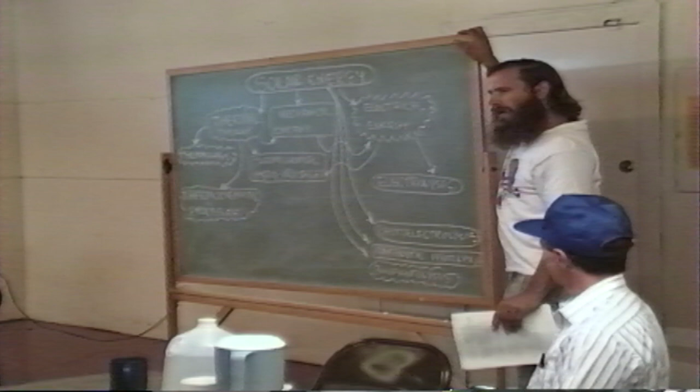We'll take a look here at this flow diagram, and perhaps you can see some of the approaches that have been tried, along with electrolysis here, which is the process that's been around the longest and about which we know the most. But there are other more obscure approaches that may be very viable and in the long run may prove to be more economically feasible than even electrolysis.

So if we have solar energy, the problem up till now has not necessarily been how to capture solar energy, but how to store it and distribute it. Because by its very nature, solar energy is intermittent - it varies from day to day, it varies from season to season, it's concentrated in some parts of the globe and not others, and so it doesn't necessarily match the needs of consumers. So what we need to accomplish is to produce hydrogen, store it, and then distribute it.

Now, there are techniques and strategies for harnessing solar energy and converting photons into electrical energy. For example, photovoltaics, or solar thermal processes like Stirling engines mounted at the focal point of parabolic dishes, or like the Luz plants in Southern California that produce currently most of the solar generated electricity in the world today. And wind generation of electricity is one of the most affordable methods right at this point in time. The price keeps coming down - it's down to maybe 7 cents a kilowatt hour, and they project in the near future it may be down as low as 5 cents a kilowatt hour and competitive with fossil fuel centralized power plants.

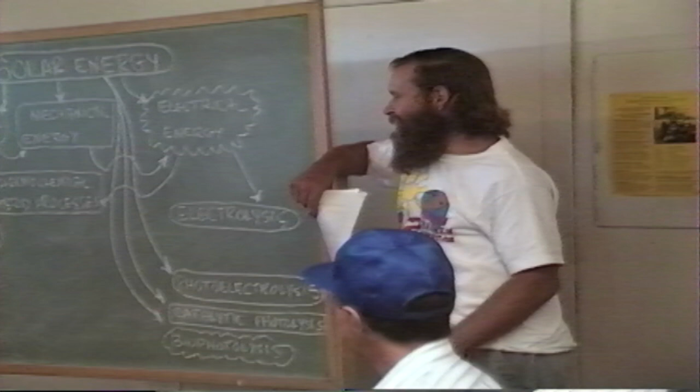This was kind of thrown on me. They asked me to do the overview. I didn't know I was going to be doing this talking. I'm David Booth. I'm affiliated with Alternative Energy Engineering. I have a little hydrogen information booth attached to that tent. I consider myself a student of hydrogen. I'm in no way an expert. These are the three panelists, the experts in the field, whether they want to be called that or not. They have as much expertise as we're likely to find in this country with the amount of research and development funding that's made available. They have done some very exciting work.

Want to introduce yourselves? Sure we can. I'm Walt Pyle from Chevron Research and Technology. I'm going to be talking to you a little bit later this morning about thermolysis, which is the one-step thermal process for manufacturing hydrogen from water and sunlight.

I'm Peter Lehman. I'm a professor of environmental resources engineering at Humboldt State University up north here. And I'm going to be talking about a project that we have ongoing at HSU in which we use electrolysis and produce electricity using photovoltaic panels, then produce hydrogen by electrolysis and recover the electricity with a fuel cell.

Be talking about that. I'm Roy McAlister. I'm president of the American Hydrogen Association, and I'm going to be talking about the subjects that these two fellows leave out. And I'm going to answer questions. I'd really like to hear your questions, and I'll shape my comments to your areas of interest.

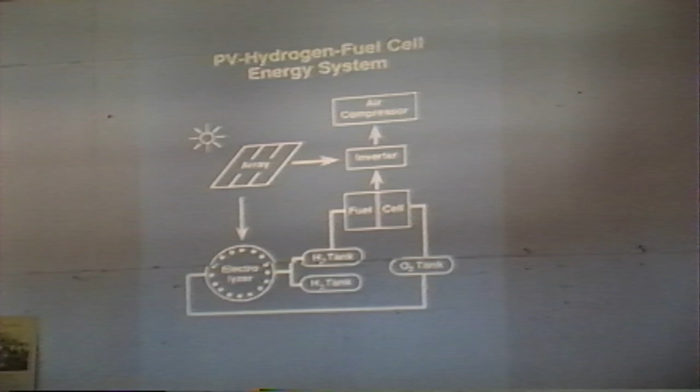That makes hydrogen and oxygen, and we store them in tanks. The electrolyzer is an alkaline, bipolar, medium pressure electrolyzer. It produces gases at about 100 psi, and they are stored in tanks, 2 hydrogen tanks and 1 oxygen tank, because you get twice as much hydrogen as oxygen. We just use regular LPG storage tanks. We have 1,000 gallon storage of hydrogen and 500 gallons of oxygen at about 100 psi.

Then, whenever the sun can't provide enough energy to run the air compressor on a very cloudy day or at night, we feed the gases to a fuel cell, and the fuel cell automatically and smoothly takes over the load and supplies the electricity to the inverter and the air compressor.

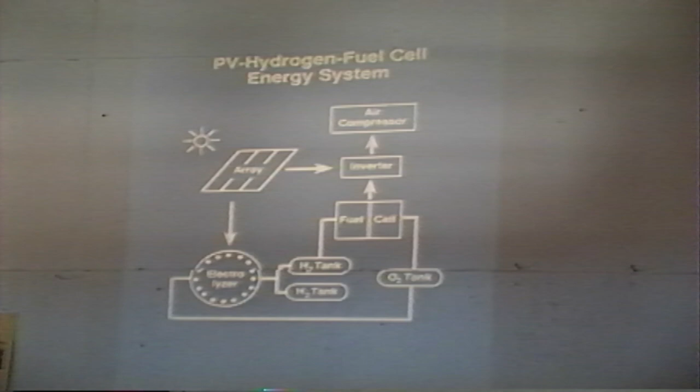I should tell you right off the bat that this project is now about 2.5 years old and has been running real well, except for the fact that we don't have a fuel cell that works. That's a long story, which I will tell you some of. Okay, next slide please.

Here's where we are. Most of you know about Arcata. When I give this talk elsewhere, people don't know about Northern California. We're in the northern part of Humboldt County in Trinidad, about 15 miles north of Arcata, which is the main campus of HSU, is the Marine Laboratory. Okay, next slide.

There's the sign at the outside of the Marine Lab. Next slide please, and there's the array.

It is 192 ARCO modules. These are really ARCO modules - we bought them from SES in Willits, just before ARCO was taken over by Siemens, the German company that now owns ARCO. So these are some of the last ARCO modules in the world. And you can see the location, it's right on the coast, on the Pacific coast.

That's very scenic, and I get nice views. How many cloudy days do you get a year? I get a lot more cloudy days than you get here in Willits.

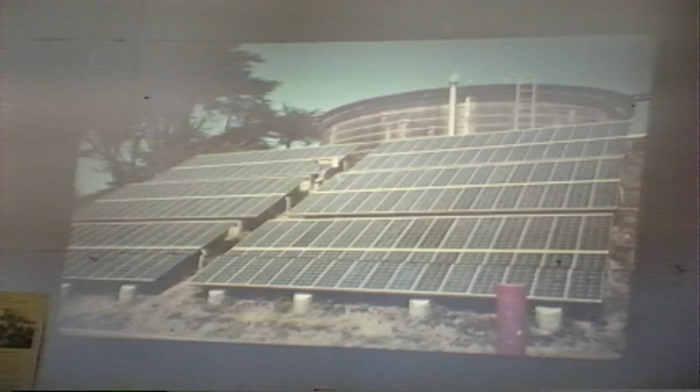Okay, next slide please. You didn't have to do any landscaping there, that was a convenient south slope? That was a convenient south slope, and in fact, when I first got to HSU 13 years ago, I toured the Marine Lab and saw that south slope and said, that's a perfect place for a solar project. And sure enough, 10 years later, we did it.

Now, having said that, if you ask me if I'll ever do this again, the answer is no. Working on a 32-degree slope was a pain in the butt. It was really hard to get that set up like that. In fact, Tim Murphy was one of the people who really put in a lot of work in getting it to look as nice as it does.

I can say something about how these arrays work. There are 6 structures, each structure is 2 subarrays, and they're each divided in half electrically. So there are 12 subarrays in total, and each of those can be switched individually either to the load, the air compressor, or to the electrolyzer. That's the way we control the system, and I'll show you a little about that later.

This is a 24-volt system. Each of these pairs, one on top of the other, is in series, and the rest are in parallel, so we're running at 24 volts. We chose 24 volts because the electrolyzer was available in about that voltage, although the electrolyzer voltage varies somewhat. If this were a large commercial PV hydrogen facility, we would choose a much higher voltage, so we'd have much smaller wires. In fact, if I were designing this on a larger scale, I would probably design it to run at 400 or 500 volts. That's a lot more dangerous, but on a commercial scale, it makes a lot more sense. So this is a low voltage system, but probably in the future these will be high voltage systems.

Here's the electrolyzer, it's hard to see, isn't it? Everything here is the inside of the building now. The electrolyzer is this gray frame thing in back. Everything, the electrolyzer and all the piping, is in a hood which has plexiglass sides. Here is one plexiglass side, magnetically attached to the metal framing around it. It's all sealed in that hood, which is continuously vented by an explosion-proof fan. There are vents in the bottom that draw air from the bottom of the building through that hood area, and the idea is that if there's any hydrogen leak, it's immediately vented.

We have hydrogen sensors in the lab and in the hood. Whenever the hydrogen concentration gets to half of the lower combustion limit, which is 4%, so when it gets to 2%, we would shut down. We have an air movement sensor in the hood, and whenever the ventilation fails, we would shut down. That's trying to be as safe as possible.

We have taken hydrogen from the electrolyzer, in fact we do this frequently, and dumped it straight in the hood. With the fan on, it barely budges the needle on the hydrogen sensor. What that's saying, going back to a comment made earlier, is that hydrogen is so buoyant and so diffusive that it doesn't build up at all. Even if we turn the fan off, it's not possible to get a combustible mixture inside the hood. The natural buoyancy of hydrogen going up the duct is enough to carry it up and away before it reaches a combustible mixture.

And what else is in there? We have a small battery, I'll talk about that in a minute. We have a chiller which sends chilled water to condensers. We condense as much water out of the gases as we can before we put them in our storage tank, so we don't end up with a small lake inside the storage tank.

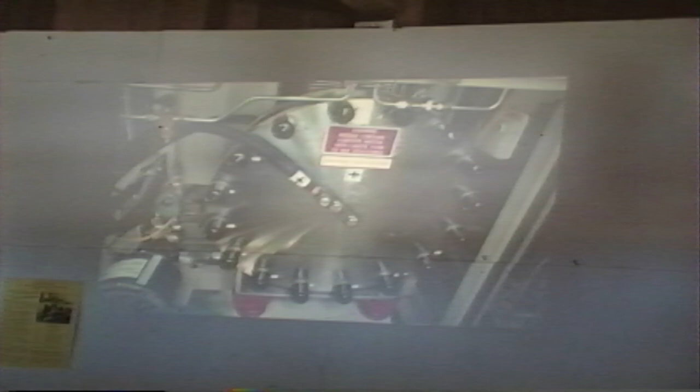You're bringing in outside air, Peter, so it's full of salt and stuff, right? Well, yeah, it remains to be seen how long the fan lasts before it falls apart and things like that, which is an issue, stainless steel corrodes in this environment. Fans are easy to replace, but all this other stuff, well, so far we haven't seen much corrosion, so I'm fairly hopeful. The air does come in from under the building, so the airborne salt spray thrown around in a big storm is less likely to make it into that airstream because it's got a very convoluted path. But it remains to be seen how corrosive this will be.

This is a close-up of the electrolysis module. That warning high voltage sign is something I got to change to a warning low voltage one of these days, because it is low voltage.

You can grab it like this and nothing happens when it's on. That is a stainless steel end plate, and there's another stainless steel end plate. There are 12 cells - this is a 12-cell module.

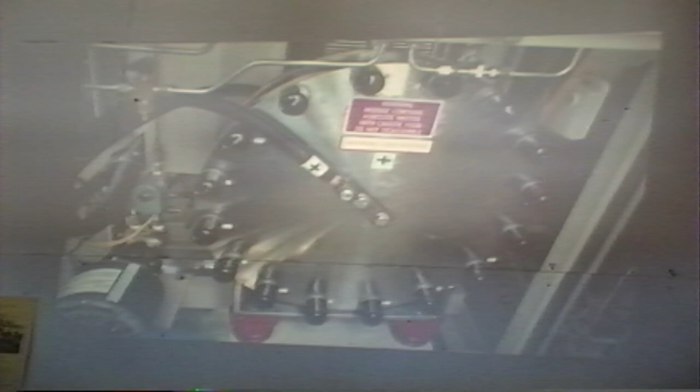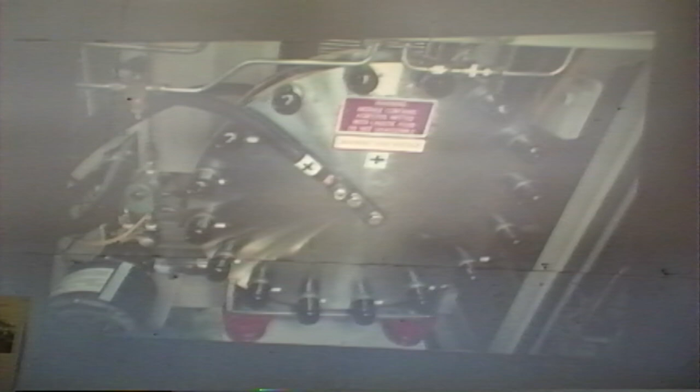The reason we chose 12 cells is somewhat of a long story, but the short part is each cell operates at about 2 volts. So if you have 12 cells in series, you end up with a 24-volt electrolyzer. It is possible to put many more cells in series, and Teledyne, who makes this electrolyzer, sells a module which is very similar with 120 cells in it. That would operate at about 240 volts. And of course, you could gang them up in series so they operate at even a higher voltage.

Okay, next slide. What was the cost of that unit? $36,000 - about $6,000 per kilowatt. It's about a 6 kilowatt electrolyzer. But having said that, in a much larger size, the cost, even today when electrolysis equipment is still a specialty kind of equipment, you can get the price down to about $1,000 a kilowatt, about 1/6 of this. And if this became a technology utilized to a large extent in this country, the price would come down. The materials cost is not that great - you're really paying for engineering in this device.

I might say that having paid for the engineering, we had to do a lot of re-engineering and redesign of this system to work with a photovoltaic system.

One question about the electrolysis - I've tried this at home with copper electrodes, but while I get hydrogen, the oxygen always corrodes the electrode. So how do you capture the oxygen? Well, these are special electrodes which have been developed over many years and are carefully done so they don't corrode. Also, we use deionized water and purified electrolyte - potassium hydroxide is the electrolyte. As a result, they last a lot longer. They don't last forever - there is maintenance required, and eventually you've got to throw the module out and start again. But different materials work better. These use stainless steel electrodes alloyed with nickel and plated with stuff that Teledyne won't tell me.

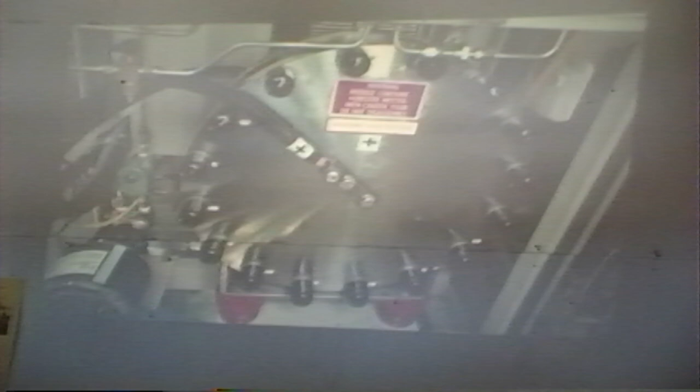Here's a side view of the module. These are the end plates, and these are the wires. So the current goes in here, through there, and out here. And it's got to be conductive.

Why would the end plates have to be conductive if the current path is strictly through the electrode? Well, here's our power, coming in two big wires, and you've got to get it into the electrolysis module and back out again. How do you do that? The easiest way is to have a metal connector and bolt it onto a metal plate.

If the end plates were plastic, you could always bring a stud out and still make it work. It's just that at $36,000, they can afford stainless steel end plates.

The conductive polymer may not be cheaper than the stainless steel, but there are questions about what works best. For both fuel cells and electrolyzers, conductive plastics will fulfill an important need in the future. I'm not sure how that's going to happen, but I think it's got to happen in order to get the price down to a reasonable level.

Does the configuration of the anode make a difference — is a flat surface less efficient than a round, pointed, or square one? Which is best? Is a flat surface more efficient, or is a surface with many angles and sharp edges better? I really don't think there would be a difference.

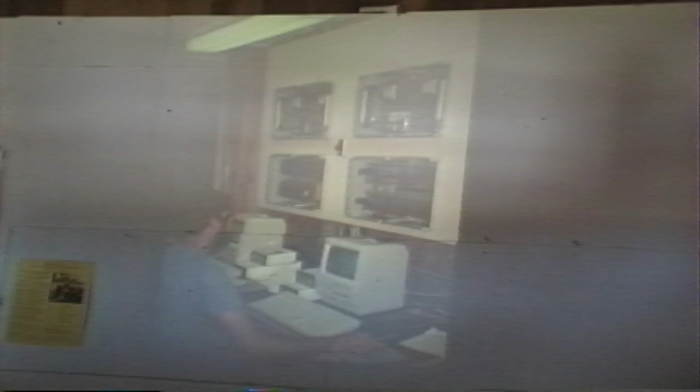This is our control system. We have two computers — this whole system is run with a Macintosh SE microcomputer. This is Ron Reed sitting at the computer. The computer on the right is the control computer, and we wrote all the software. Tom Herron did most of the work, wrote all the software which controls this system. The computer takes input from the environmental inputs from the system — how much current is coming from each of the arrays, what's the temperature of the electrolyzer, what's the current, what's the pressure in the tanks, etc.

Lots of different inputs, and then it makes control decisions based on that information. The computer on the left is a monitoring computer. This is an experimental setup — we're trying to optimize operation and take data, and that computer records about 30 pieces of information: temperatures, pressures, currents, voltages, etc. From that, we're able to analyze how things are working.

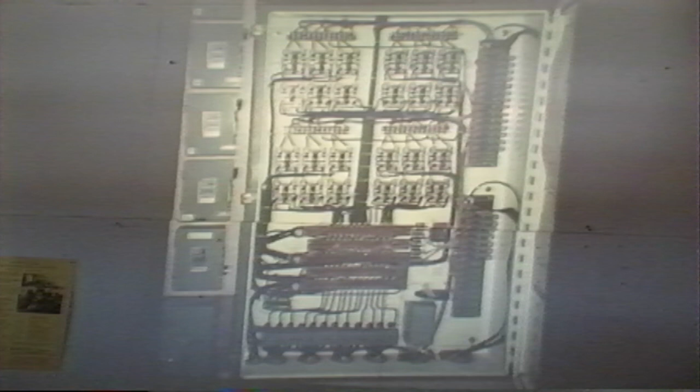Yeah, there's the inside of the can, and those are all the relays and buses that distribute the current one way or another.

I should say that we have done our best. I think John Wiles is here. Is John Wiles here? Anyone? He's out of class.

John Wiles helped us with our wiring. We have done our best to try to follow the National Electric Code in wiring this system. It has been a struggle. John helped us to a certain extent, and to a certain extent we just had to use our imagination because the code is still being developed. But all these disconnects and all the wiring is set up to conform to National Electric Code standards, and as a demonstration project, I think it's important that that be true.

The safety standards—there are no international safety standards for hydrogen energy systems at this time. There's an effort underway in Europe, in the ISO, the International Standards Organization, to write safety code for hydrogen systems. But that hasn't happened yet. And what we need is a John Wiles in the hydrogen field to write those kinds of regulations.

Okay, next slide please. This is some of our gas measuring equipment. It's also inside a box which is vented—you can see the vent pipe up here. What we've done is all the fittings for hydrogen are either outside or in this vented enclosure and in the hood. That's our effort to make sure we don't have a hydrogen leak inside our laboratory building. This is gas measuring equipment, both electronic and visual.

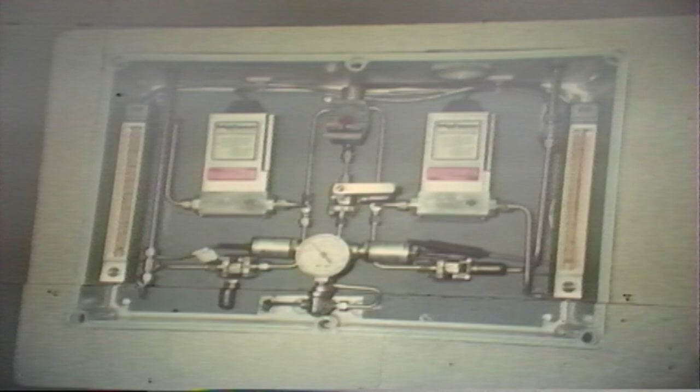Before, when we first built this system, we didn't have bubblers. The bubblers have served three useful purposes. One, they give us a visual indication of flow, which is real useful. Two, they wash the gases, because the gases have come out of a potassium hydroxide reservoir and as a result have a little potassium hydroxide in them as an aerosol. These bubblers wash that, especially on the oxygen side, and take the potassium hydroxide out. The third, and probably the most important purpose, is they allow something to move and people have something to look at when they look at our system.

This was a suggestion of Hartmut Steeb, a German who is in charge of the only other solar hydrogen facility in the world, which is in Stuttgart. He said, you need something for people to take pictures of when they come.

Let me say a word about safety. Somebody asked originally—we have both hydrogen and oxygen in this system. So far it's been my experience that the hydrogen is much easier to deal with than the oxygen. We've chosen to collect the oxygen; this system, the electrolyzer, was not originally designed to collect the oxygen. We have redesigned it so it can, and the oxygen has been more troublesome than the hydrogen. Pure oxygen makes anything that will burn into a combustible mixture, and therefore is particularly dangerous. The hydrogen, if you keep it away from air and oxygen, which is not that hard to do, is fairly easy to deal with.

I hope we continue to be a safe operation, but thus far we have been, and the hydrogen, at least from my point of view so far, is relatively safe and easy to deal with.

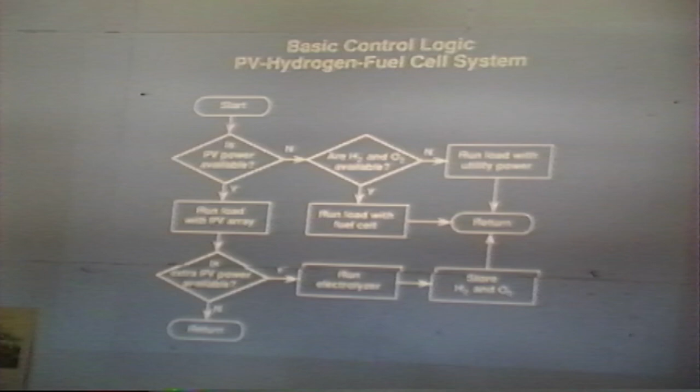Let me go through this quickly. This is the basic logic that we use, and this is what the computers do. We ask, is PV power available? If it is, we run the load with the array. If there's extra power available, we run the electrolyzer and store hydrogen and oxygen. If there isn't PV power available, we ask whether there's hydrogen and oxygen available. If so, we run the load with the fuel cell. If not, we return the load to utility power.

This is a typical standalone system. Somebody's probably thinking, why don't you use a battery instead of this hydrogen system? That's a good question, and the fact is a battery type system would work much more economically than this system at the present time. But our goal is not just standalone power - our goal is to develop this solar hydrogen technology, and as a result we're doing it this way. Next slide.

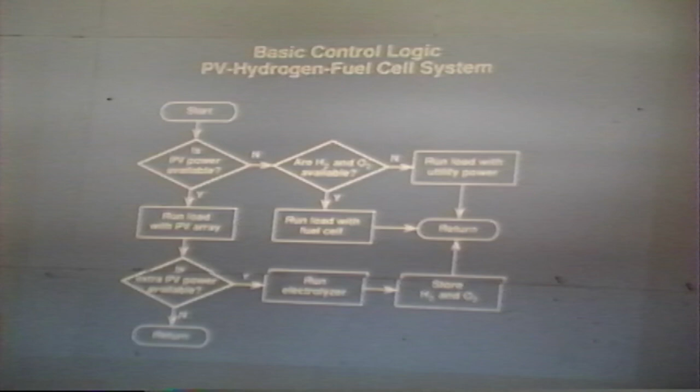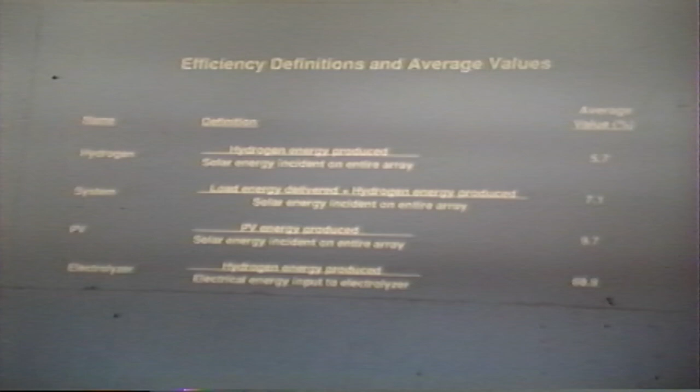That's approximately the product of the PV efficiency and the electrolyzer efficiency. That's sunlight at our sea level here? Doesn't matter. Current technology. But that's only using PVs? That's not any other alternative source? That's PVs and electrolysis.

What was the efficiency of the electrolysis of electricity for hydrogen? That's on the bottom there. So you have some kind of calorimeter or pyranometer? Yeah, we have a pyranometer. We have two pyranometers that measure the sun all the time. And this is at fairly high insolation values?

Yes, that's right. But you have obtained 90% efficiency from your electrolyzer. Yes, at very low currents, when the electrolyzer is heated up, under certain conditions you get much higher efficiency. But this is the bottom line. This is what happens over a long period of time when you're warming up, cooling down, shutting down, switching. All those things cut into the efficiency, and that's the bottom line.

What is the approximate liquid volume of the electrolyzer? About a gallon. About a gallon of electrolyte.

Let me say a word about the fuel cell. When you measure efficiency, are you talking about the higher heating value or the lower heating value? Higher heating value. That's exactly right.

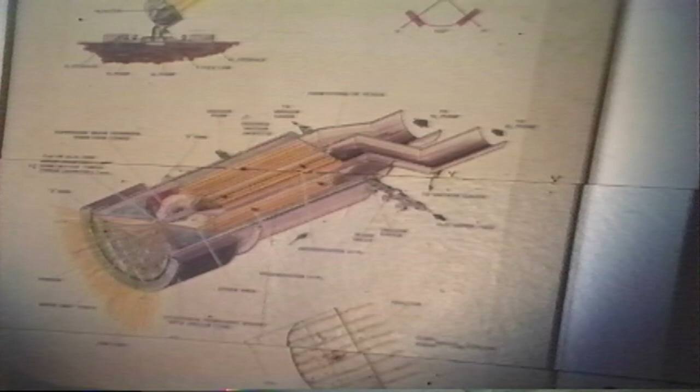The picture on the board here in the back, I'd like to start with and end with. I've used it because it's graphic and I thought it might spark someone's imagination. In the job that I'm in, I have a lot of time to think about things, and I also have a lot of work to get out on a given day.

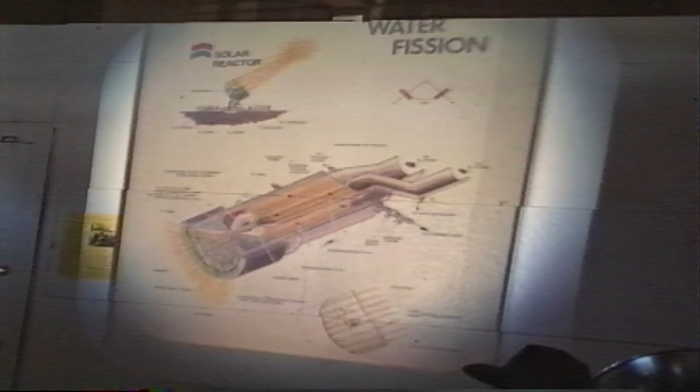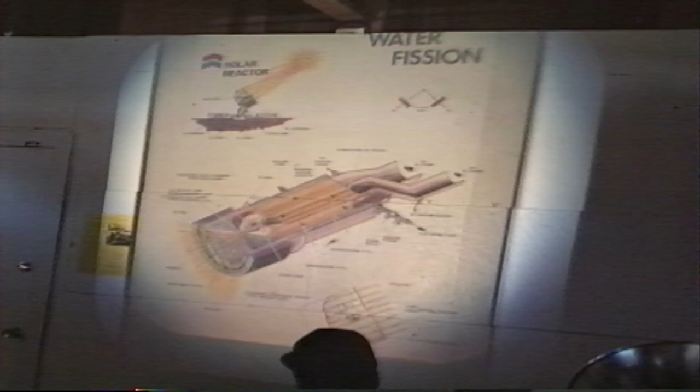So one of the things I like to do is dream a little bit. Right now, if you look at what's available commercially for someone in this audience who might want to get involved with hydrogen, you have a fine research tool like Peter Lehman just described, where it's computerized, has instruments on everything, and allows you to tell very well what's going on in the total system so you can study the economics and the components. I think when you leave here to see the other end of the scale of what can be done with photovoltaic electrolysis, you might like to go see David Booth's display, because he's perhaps a little modest when he says he's a student. He's also a teacher, and he teaches at the Solar Energy Research Institute.

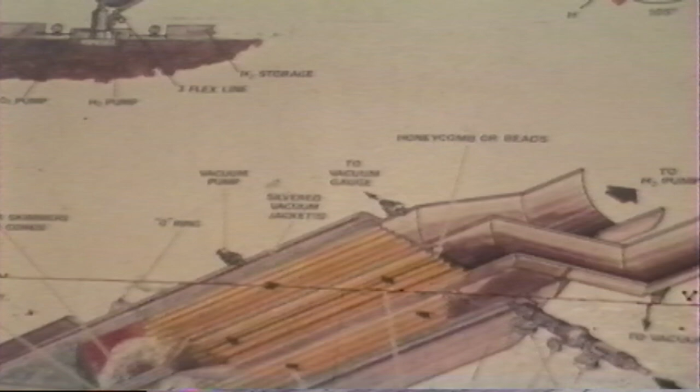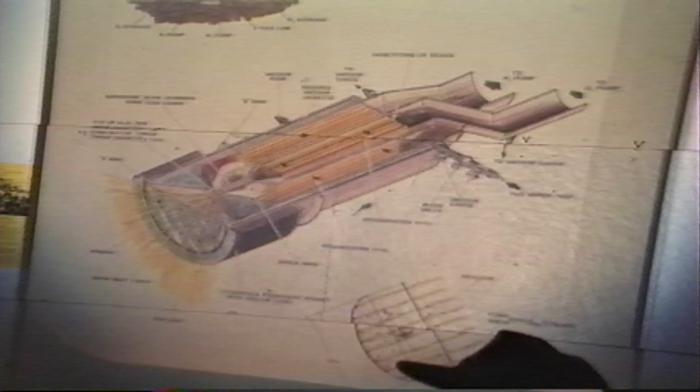He has some courses this summer on solar hydrogen. He's got a demonstration of what a person, any one of you, could do if you put your mind to it. He's taken photovoltaic cells, I think about 4 on the display outside, and hooked them up to 4 electrolyzer cells that are this big around and this long. They're $125 a piece, and they run at the magic 1.65 volts. They're every bit as good as the ones in the German laboratories. They're made by a guy in Lineville, Iowa, in his barn. For $125, you can be in the solar hydrogen business with one PV panel. So take a look at David's show over there, and I think you'll find it fascinating.

Well, what I'm going to take you through here is what I call my dream. Sometimes dreams have happy endings and sometimes they don't. This is a dream that started in 1979 when I was working in the photovoltaic group at our lab. I came across some work done by the French over in Nancy, France, on thermolysis. Thermolysis is shown here as one of the branches off thermal energy, where you take solar energy, the heat and light, and use it to do a process called thermolysis. The picture on the board is an overview of how we viewed the possibility of doing thermolysis in 1979.

Basically it consists of a solar concentrator. It would be a mirror, preferably a parabolic dish, something that looks a lot like a satellite receiver, only with a mirrored surface. That would focus sunlight by following the sun through the sky during the course of the day, and concentrate it onto one very intense hot spot where you have a much higher quality heat than when sunlight falls on a diffuse surface like you find in a solar water heater, for example.

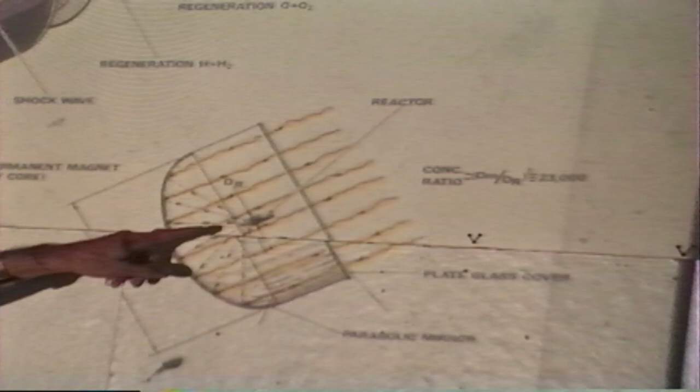We went looking for a large mirror so that we could start doing some work for this. We ended up with a searchlight, which we picked up for about $500. It used to be used for advertising openings of car lots, and that became our concentrator. It's a 5-foot dish, and it's a really high-quality mirror.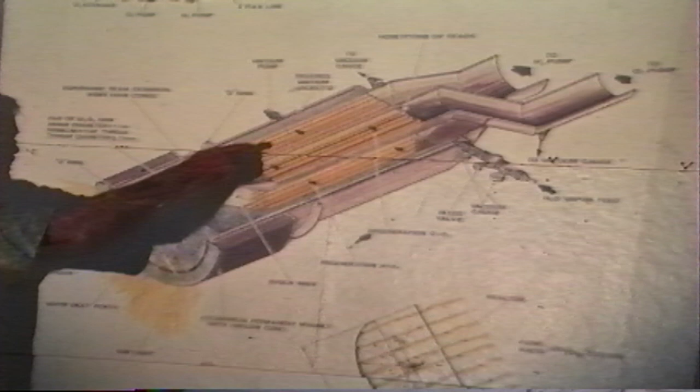Inside the searchlight, we installed a reactor which was originally conceived to look something like this. It would have a transparent window in the front that would allow the concentrated sunlight to come in. It would have a target on the inside which could reach a very high temperature, and then a water vapor feed which would come around the sides, pick up the waste heat, and be introduced so that it would flow over this very hot target. Downstream from the target there would be an attempt to separate any products formed when the water was heated to its decomposition temperature.

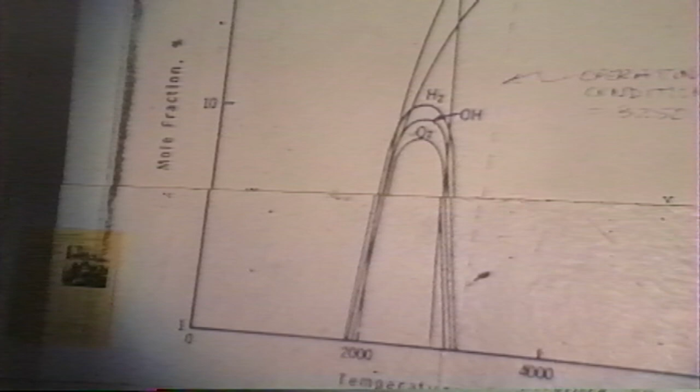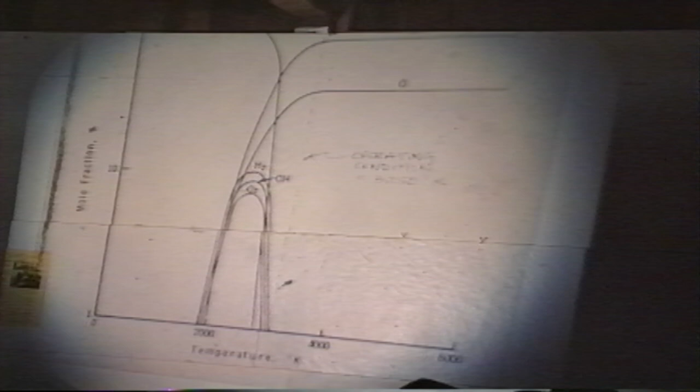This is what happens when you heat up water to high temperatures. Let me get that up so you can see it better. What we're looking at is a temperature scale on the bottom, in degrees Kelvin—if you like centigrade, just subtract 273. On the left-hand side is a log scale of the mole fraction of each particular element, and you can see there's a family of curves here. The one coming up and off on the bottom is oxygen, and the one above that going off the screen is hydrogen. Let me bring that down so you can see.

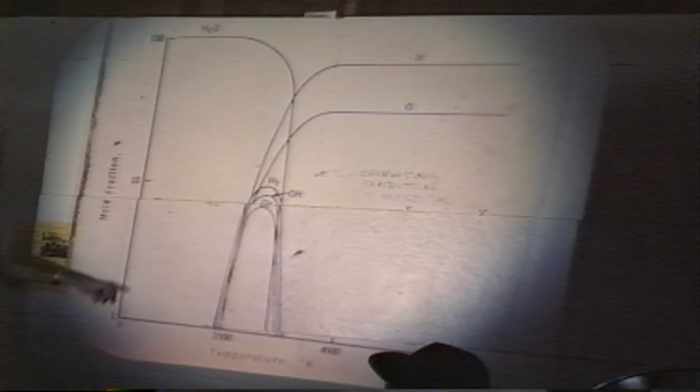So in the beginning, if you start at a very low temperature, you've got completely water—there is no hydrogen and no oxygen, just water, the starting material. But as you increase the temperature and get up in the neighborhood of 1,800 to 2,000 degrees, something starts to happen: the water is starting to decompose. This is an equilibrium diagram, and I'll show you a few reactions on the next few graphs. But basically the water goes away, and by the time you've reached about 3,200 degrees there is no more water left. It's all broken down into the components of H2O, two parts hydrogen, one part oxygen. That's why the hydrogen curve is higher. The reason it isn't twice as high is, again, it's a log scale.

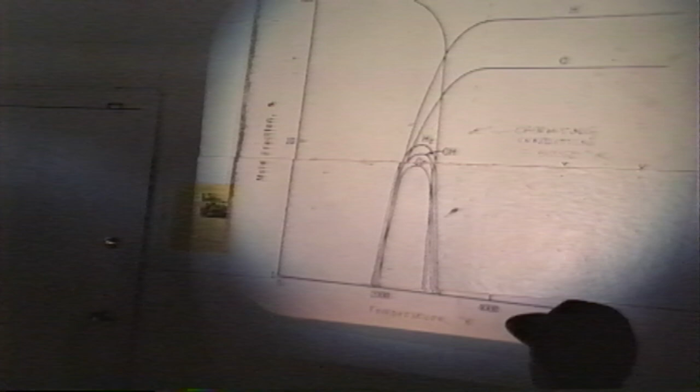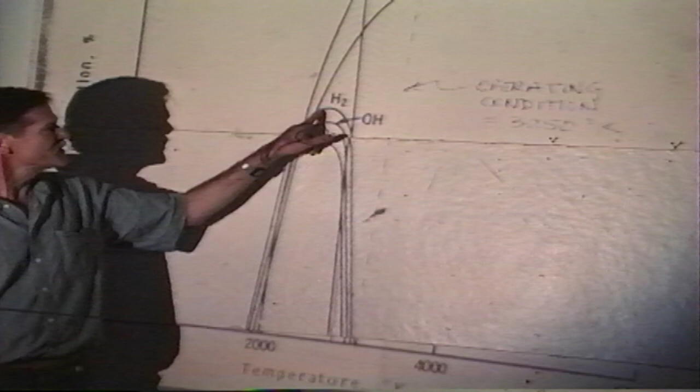Down here you see a couple of other curves: this one is the H2 curve, this one is the O2 curve, and there's an OH curve in between. These are all possible products when you decompose water. The OH curve is sometimes called hydroxyl, and H2 and O2 are the diatomic gases. If you buy a bottle of hydrogen from a welding supply, you'll find it contains H2, not H1—H1 is called atomic hydrogen. If you get to a high enough temperature, you see H2 going away and atomic hydrogen growing. When you get up to 3,500 degrees or so, it's all atomic hydrogen and atomic oxygen—there's so much energy that it can't stay together in a diatomic molecule any longer.

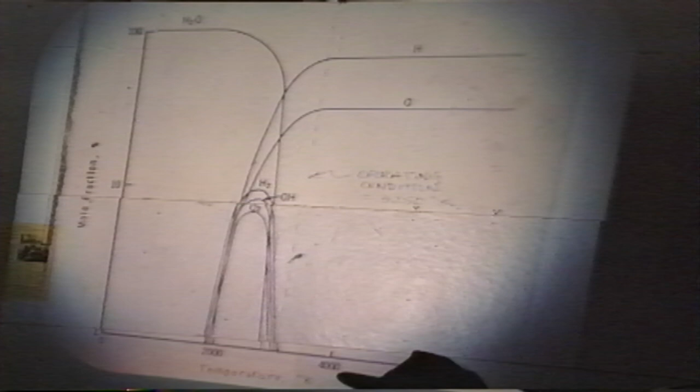So what we're trying to do is operate where the dotted line is, around 3,250 Kelvin at this pressure, and we've been able to operate there successfully. That may sound great, but that isn't even half the problem. The real problem is separating them before they recombine, because this hot spot is very small and the gases are only at this temperature for an instant. As soon as the temperature falls when it leaves the hot spot, it goes right back to water, and you've got to stop that back reaction if you want to get any of the hydrogen.

What kind of materials do you use to contain something at 3,200 degrees? We're using zirconia and quartz.

Zirconia is zirconium oxide, a ceramic. There's enough of a temperature gradient across the surface that even though these temperatures are higher than the melting point of the zirconia itself, it doesn't melt because it's got a gradient through it. And it conducts the heat away fast enough into the other side where the cool fluid is coming in that you can make it survive. There's a surface film across there that acts like a further gradient in the gas phase.

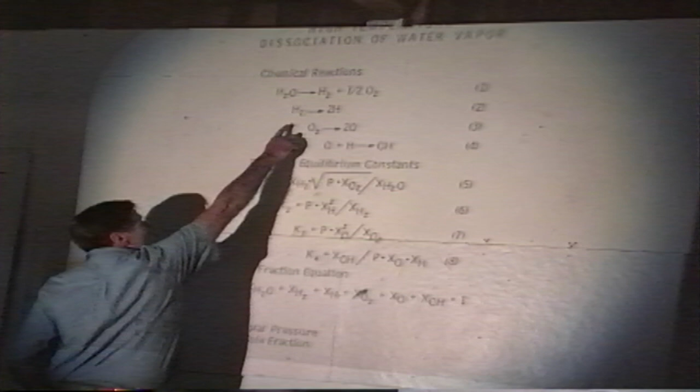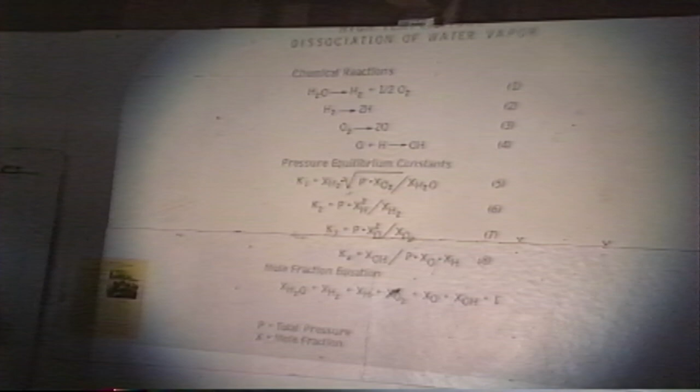But there's also some other reactions where the hydrogen decomposes from diatomic hydrogen into atomic hydrogen, likewise for the oxygen. And once you have atomic hydrogen and oxygen, you can form the radical, or the grouping OH. Each one of these has a pressure equilibrium constant associated with it, how much energy it takes to make that reaction go, so you can put these together, and that's how these curves are derived.

Well, after I saw the French work about decomposition of water, I looked into their methodology, and this is one of the types of work that was done by Villermaux and Lédé back in the early 70s. This is about 74 to maybe as late as 1981 or 82 that they were working in this area. Basically what they would do is put water into the center of a spherical globe so that the interior of the globe contained water vapor and had a surface, and then they used a parabolic mirror to concentrate the sunlight onto this globe.

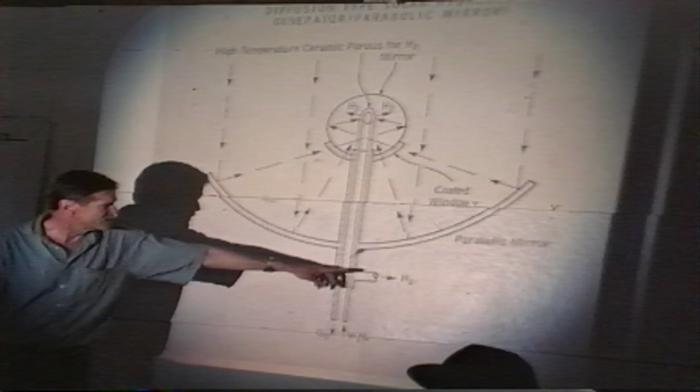They would remove the products of hydrogen and oxygen through these tubular membranes, and in that work achieved efficiencies initially of about 1% conversion, where they were able to capture about 1% of the hydrogen that was produced. Later on they had a few pieces of data where they used a more elaborate quenching scheme, putting cold argon on it, where they obtained about 5 or 6% conversion.

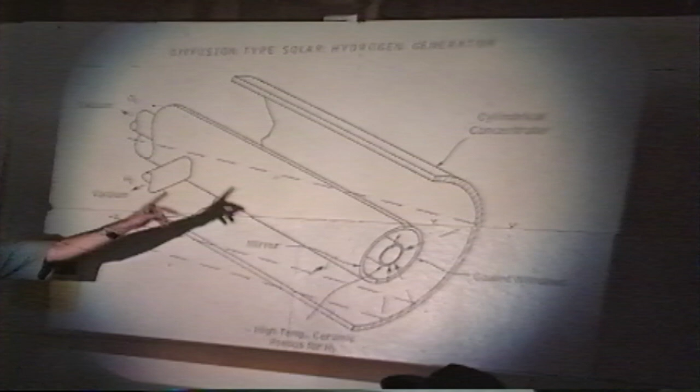This is another geometry for the same type of separator. This one was to use a linear concentrator, a cylindrical type of concentrator with tubes that ran down the focal point, like a line focus type of geometry.

All the funding was cut off by the French government in the late 70s after the first fuel crises were over. So I went over and had a chance to talk to the people, and we were mostly concerned that the reason thermolysis had never come to any commercial success was the fact that no one had ever developed a separation method which could quench these products quickly enough to prevent them from going back together again.

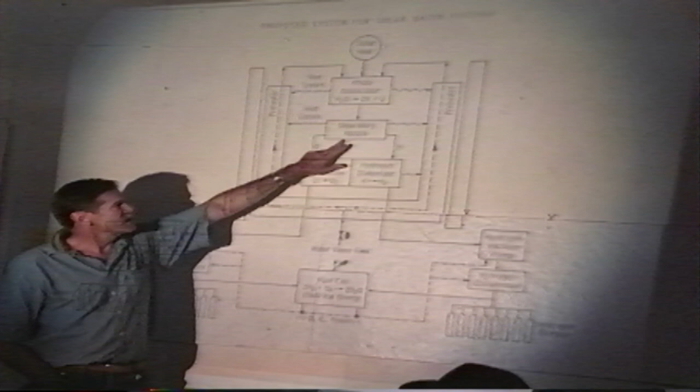And then we were going to try to use a separatory nozzle to separate the hydrogen and oxygen. This technology comes from the nuclear industry. It was developed by a person named Becker in Germany; in 1955 was the first paper published on it. It was used to separate uranium isotopes for purification of uranium, and so we thought it might be applied here, and that was the beginning of this project.

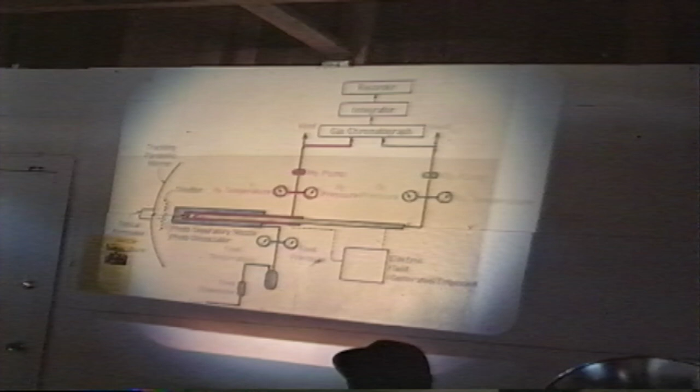So our first reactor used the solar heat source, which is a searchlight, and we installed our reactor at the focal point of the searchlight. Here's the representation of the mirror, and the focal point of this mirror is very close in. It's not like a lot of mirrors where the focal point would be way out here, but this one has a relatively low F number, about 0.6.

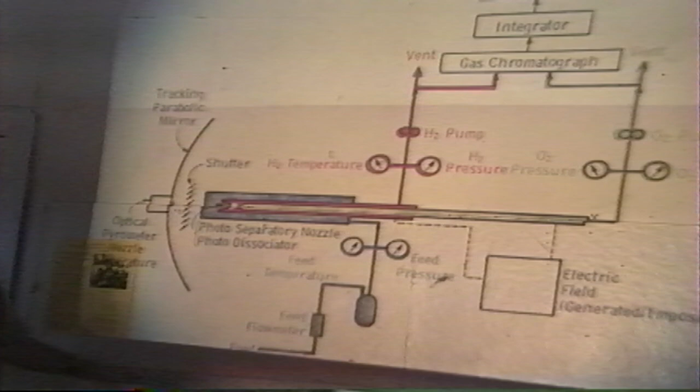So it would come in the window and focus on a target, which we call the photodissociator. Then back in the section behind here is the separator. We had two product lines, one dealing with a light product containing hydrogen, and one with a heavy product that contained the oxygen. Both were expected to also contain water vapor, which went through and wasn't converted.

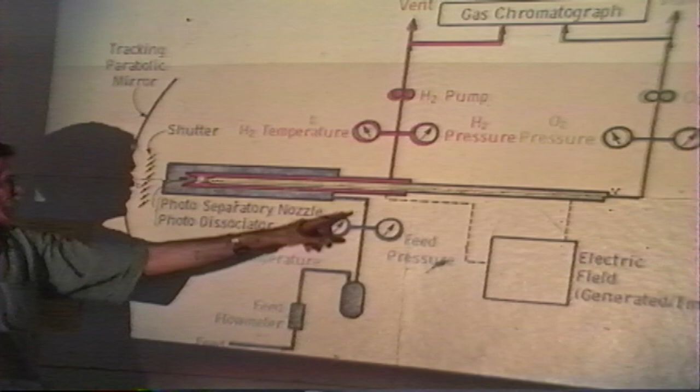Then this goes to an analysis system. Here's your feed water in blue, you can see how it comes up the outside and goes into the nozzle. The red is the hydrogen and the green is the oxygen. There's also an analysis system; initially we were using a gas chromatograph to analyze the gases, and we're now using a residual gas analyzer.

Could you go into the principle of the nozzle a little more? Yes.

This is probably the best one I have to go into the nozzle. This is called a photoseparatory nozzle. We have a patent on it.

The group of people I might acknowledge who've been working with me on this are Ronaldo Cortez from Shadowbox Construction Company, James Healy from Healy Construction Company, Mark Hayes from Illumination Computer Services, and myself, in conjunction with support from HI Solar Company.

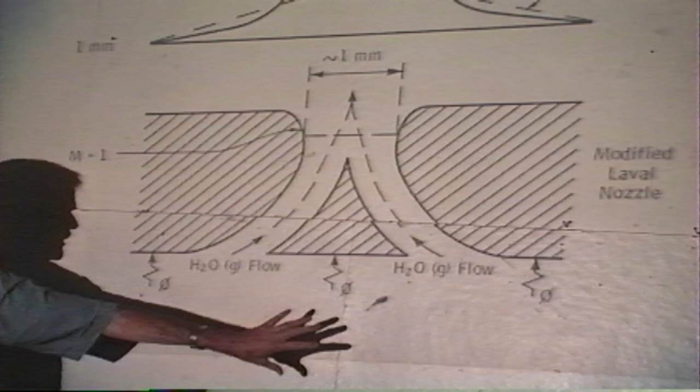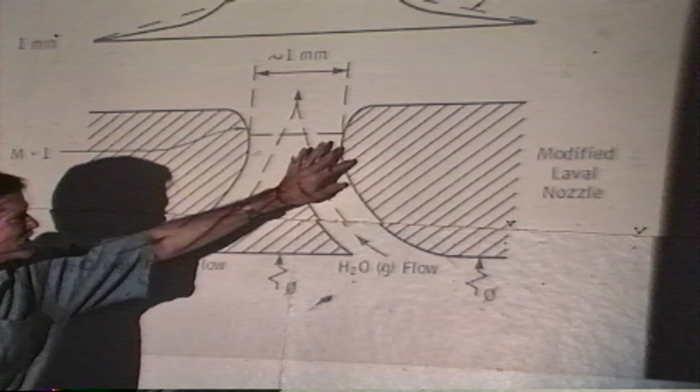The nozzle arrangement is that you have two components. Let me start from the bottom and then I'll work my way up. The photodissociator would be in this area up in the front, and you would have heat falling on this surface. This surface has been illuminated, and this surface, so what you have here is a zirconia-coated de Laval nozzle.

You have a pressure ratio across the nozzle that causes flow through it, and the surface of the nozzle is running white hot. We've measured the temperature of the surface using an optical pyrometer, and we've seen, within the measurement error, 3250 Kelvin. We think we're within 50 degrees of reading it accurately.

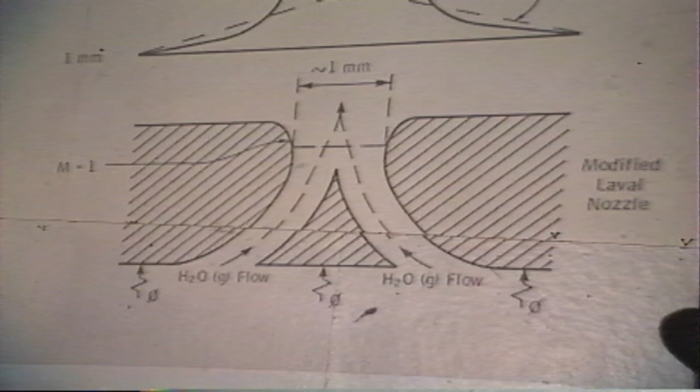So you have dissociated gases arriving at this point and expanding into an area that's at a lower pressure. The diagram just above this, at about 1 millimeter downstream in the flow field, shows a dotted line, which is the light gas, and a heavy line, which is the heavier gas. You can see that the two spatially are not equally dense in the density profile.

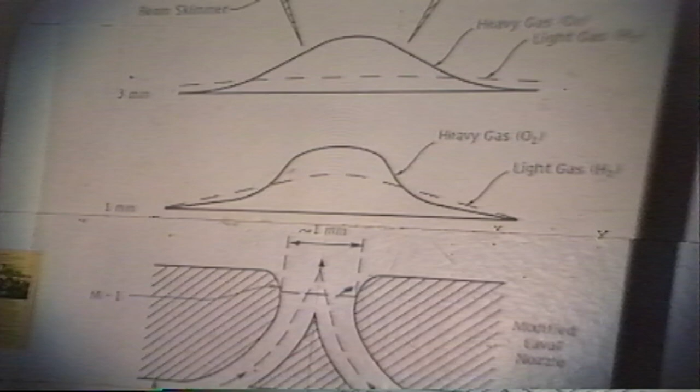Transverse diffusion is thought to be behind this—in other words, the light gas tends to diffuse this way more than that way, and the heavier gas, through inertia, tends to propagate in the direction it leaves the jet.

Is that sonic flow through there? It is, it's choked at the throat. So we run a critical pressure ratio across it to keep sonic flow there, and it makes a shock wave.

Is that a critical process? I believe it's critical—it wouldn't work without the shock wave, because the shock wave forms an envelope of density gradients, very sharp across the shock wave.

We'd like to be able to visualize this. We've got some optical components in there to try and put a beam of light through there and be able to visualize the shock wave.

Have you done any computer modeling? We've got a model, but it isn't in the computer program, no.

What about rifling the nozzle and using centrifugal force to fling the heavier gases out and taking the hydrogen out the center? It's interesting you should say that—there's a patent that's been issued for a centrifugal separation device based on a tungsten spiral that would be machined out of tungsten. I called up the guy who had the patent, and he said he'd never made one, but he'd like to someday. So yeah, it seemed like a good idea to me, but I don't know anyone that's ever tried it.

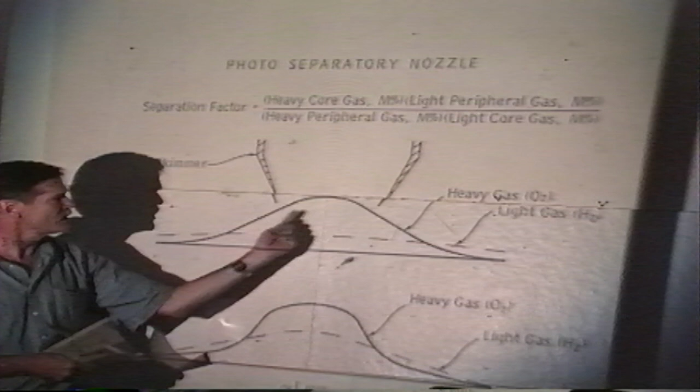So the final part of this is that out in the flow field at some distance—in this case we're talking about 3-4 millimeters downstream from a nozzle that's about 1 millimeter at the opening—you have what's called a beam skimmer. This is nothing more than a tube that comes down to a converging cone and has a very sharp edge that goes all the way around. The one here is round in geometry.

I'll show you some pictures of these parts in a moment. This is all made on a fairly small scale because it had to be scaled to our searchlight, so we didn't have any 30-foot or 1,000-foot mirrors out in the desert or anything. One thing I discovered early in the game about this is that small is beautiful and big is not required. This thing could be made big enough to hold in your hand and it would still work, or it could be as big as a football field, so it's scalable.

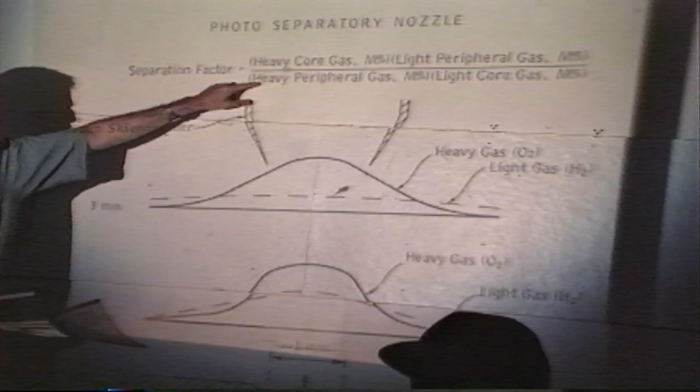The separation factor is something we really care about. It's the ratio of how much of one gas you have to how much of the other gas, in the sample you pull through here versus the sample you pull out on the periphery. You want the biggest separation factor you can get. If you could get 100% separation factor, you'd have all the hydrogen and all the oxygen separate. Right now we're working with pretty low separation factors.

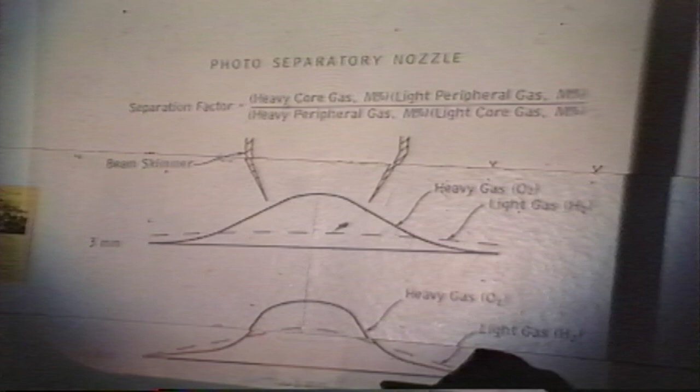Is that a product in the numerator and denominator? It's a product, yeah, of the mole percentages of each gas. It's just a defined property of a separation that's used throughout the separations industry as a way people can relate their processes.

So what you're trying to do is pull off as much oxygen as possible, and the oxygen you don't pull off will recombine with the hydrogen, and the excess hydrogen you can trap. Right, it's going to recombine and you get water, which you can condense out at either stream. But what's left over is this excess amount of hydrogen. If you had a perfect separation, each stream would have only oxygen or only hydrogen, but we're never going to be perfect.

They've made separation factors as high as 20 for uranium isotopes, which have a very small mass difference, like 238 versus 235, so the ratio of the masses is very close to 1. In principle it's possible to get separation factors that are quite high, but here we've got a mass fraction that's 16 to 1 for hydrogen and oxygen.

What is your separation factor? We're down in the neighborhood of a couple percent. But they had a bigger budget. Yeah, our budget's all privately financed out of people's pocket after they pay the bills each month.

Let me go back here one step to this view graph. This is the one I showed you earlier about the whole system. At the time we drew this, it was a conceptual diagram, and we had a recombination unit on each leg that would take the hydrogen back to H2 and the oxygen back to O2. It also recombines any hydrogen that's in the oxygen stream, or any oxygen in the hydrogen stream, back to water. So we run it through that on the way out of each leg.

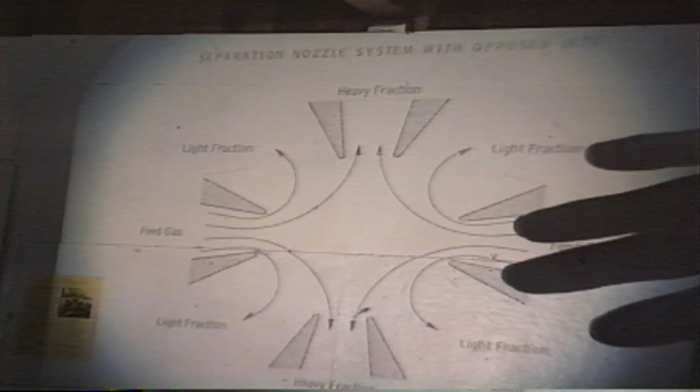This is some other geometries that were used by the Germans, by Becker and his co-workers in their uranium separation. This one is an opposed jet nozzle. Here you have the feed gases coming in the side, and they run into each other, and then the heavier and lighter fractions go by the way they turn. The light fraction has less inertia and turns easier, while the heavier fraction goes up the center.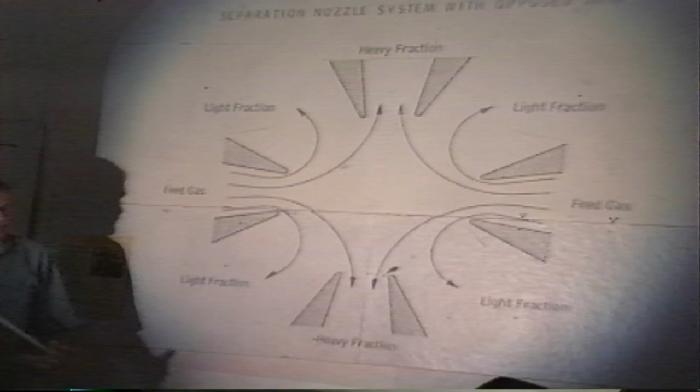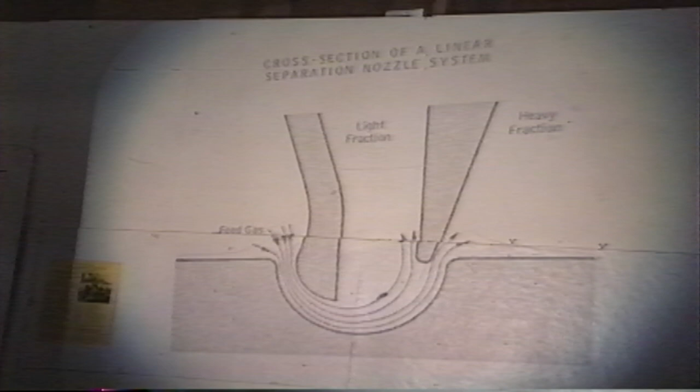This is another one that can be used for a linear geometry. You have the feed gas, containing hydrogen and oxygen, come in, and by turning, you end up with a light fraction and a heavy fraction. This is a knife-edge skimmer that could be linear, so you could have it in a trough collector.

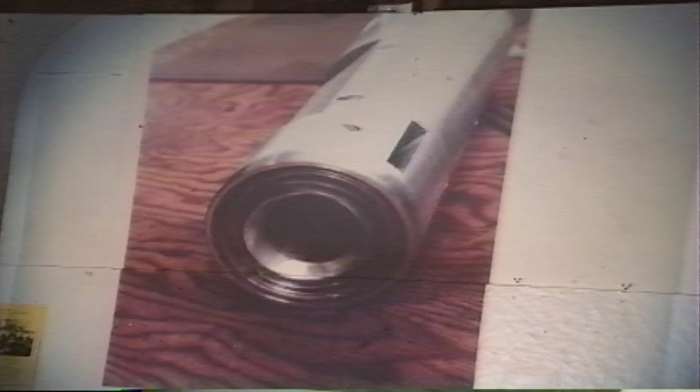Okay, I'll show you some pictures of what the system we're using at the moment actually looks like. This is the reactor containment vessel, a piece of aluminum that's been bored out and split, so you can take it apart in two halves. On the interior, for lack of a better description, I call it a thermos. It has two walls with a vacuum in between, and it's silvered, but it's like a thermos bottle that's open at both ends rather than just being open at one end like you'd normally keep your coffee in.

That's made out of quartz, and it'll take the direct beam in the event that there's a steering error and you aim the searchlight the wrong way, not quite on the sun, and the beam comes off-center and hits this quartz. It'll take the shock without cracking or breaking. So far, that's the only thing I've been able to use which will take it. It'll melt stainless steel, break glass just like that, melt aluminum. I haven't been able to put anything in there that would take a beam steering error except the quartz used on the inside.

What is the collector area? It's 5 feet in diameter, so it's about 1.8 square meters of area it captures.

I'm kind of thinking of that dissolved state of the oxygen and hydrogen splitting apart, kind of like a plasma state or something. Is the molecular charge of the oxygen and hydrogen such that you can actually maybe use some electrical currents to pull them apart?

It's interesting you should bring that up. You can be my straight man on the next talk, because where we've gone from this — if you simply have a thermolysis, in principle you don't have anything ionized. You don't have enough energy there to kick any electrons off of the hydrogen or the oxygen, so they're still in the atomic state, not an ionized state. As such, they're neutral, and they can't be steered by an electric or magnetic field.

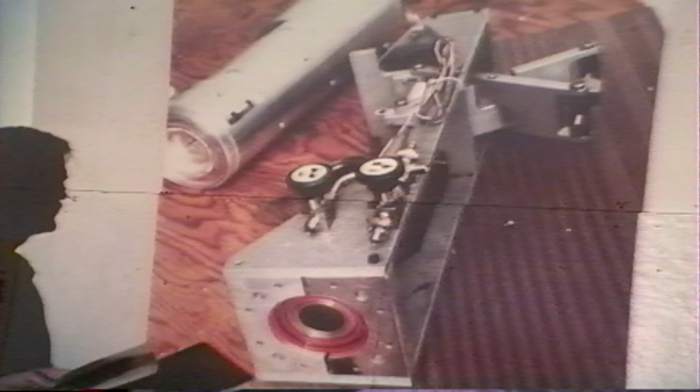This is a picture of the reactor disassembled, and this is the main reactor barrel, which you saw a moment ago, and this is the back end of it. Normally this part goes back here. This is the separator arrangement, which consists of a mechanical arrangement to move the nozzle skimmer in and out and from side to side to get it lined up.

This is the picture of the front end of the reactor with the window retainer on it. It's the same barrel you saw before, but now you see that this window is installed. There's a quartz window, a flat plate. It's not the best — it'd be better if it was a slightly domed plate — but nevertheless the flat plate's cheapest. And this has an entry angle on it. I think there's another picture that shows it a little better.

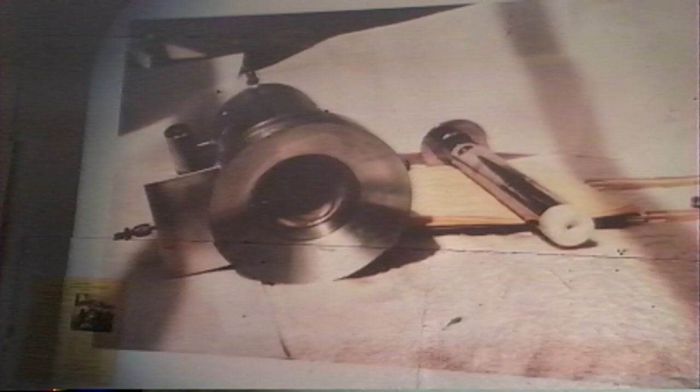This is the nozzle tube, a piece of quartz coated with a thin film of platinum, and the very end that's white is the zirconium oxide ceramic. You can see the hole in the center, which is the center of the nozzle. Are those machinable ceramics, and then you fire it after that? It's a ceramic paint with an oil base — you paint it onto the quartz, and then fire it in the reactor itself. It turns it into an open pore ceramic coating.

We just fire it in the sunlight. We paint on several coats, then put it in the sun, and it thickens, and all the oil splashes out, leaving this open pore structure. Was erosion a problem in all this? No — we run it 4 or 5 hours at a time, and it's stable.

The feather edges would kill you — on the separator. Well, the separator's behind the nozzle on the inside. I'll show you what that looks like. This is the separator unit that sits in the flow field behind the jet coming out of the nozzle. This would be inside of that last tube you saw — they're nested. This goes on the end of a stainless tube, and this is quartz with a coating of platinum. Right up at the tip is a knife-edged hole that you can move around into the jet.

How do you form that? It was formed on a hydrogen-oxygen torch in a lathe out of a piece of quartz tube, then ground to make the sharp edge on a diamond wheel. Wow — must take pretty careful machining. Well, there's a glass shop in Berkeley that made it for us, and they charge $50 a piece.

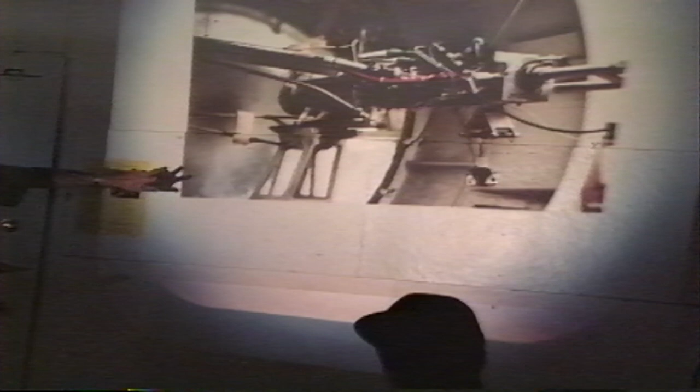So here's a photo that shows the reactor installed in the searchlight focus. This is the mirror material here that you see. And originally the searchlight had carbon arcs that were used to make the light. And we took all the carbon arcs off and installed the reactor on this stage.

These are for moving the reactor in and out of the focus point. And the window is up here facing the mirror. And the separator arrangement's here. And then this is the light product line, and the heavy product line goes off the side here.

There's a lot of instrumentation on it for measuring pressures and temperatures and flow rates. That's all the wiring is about. Certainly not necessary for the average working unit once you figure out how to make it work.

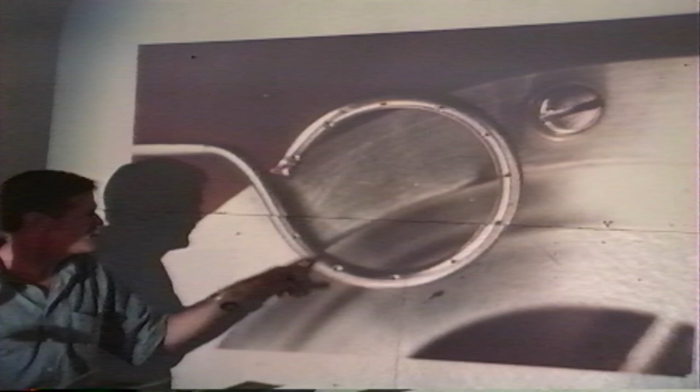One of the things about our nozzle is when we run this reactor, you can't turn off the feed. We found that out the hard way because one day we were running it and somebody turned the valve off too far. We were trying to run a low feed rate. The water vapor stopped going through the tube and the beam sliced off the stainless steel tube. It's gone. Meltdown.

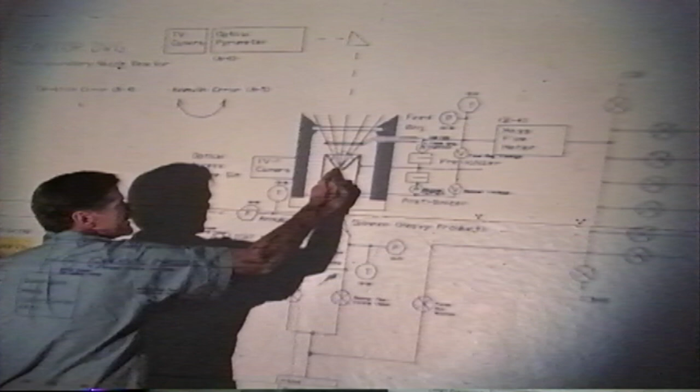This is a diagram that shows where we are now. The sunlight's coming in the front of the mirror through this window. The fireball sits right here at this nozzle. This is the white cylinder you saw. And then the skimmer is right here. The skimmer can be moved in and out and from side to side to line this up. And then we take our light and heavy product samples to the analysis system.

We have a mass flow meter here for feeding the water in. And we're using what we call a pre-ionizer. It's between this feed ring and the nozzle. We can jack up the voltage on that and put it into a glow discharge.

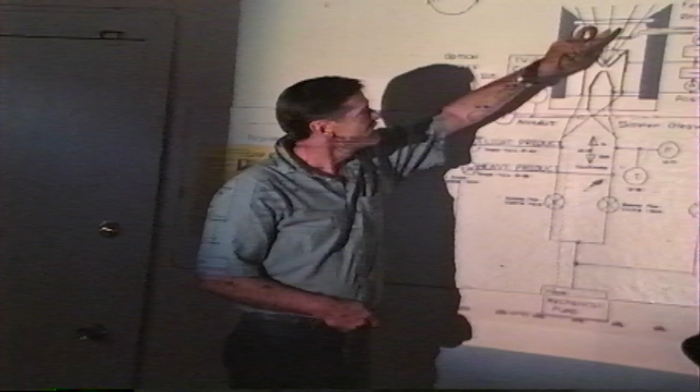And the question you asked earlier about whether we could separate things by electric field now becomes possible because, first of all, when the water vapor is coming out of this ring and going down into here, we have this whole area in glow discharge. And some people say, well, gee, how can you afford to use all that electrical energy?

Really our answer is that it doesn't take much. When we use a DC discharge, we run it in the dark, it takes about 700 volts to cause a breakdown of water vapor. In the light, it takes about 200 volts because there's a lot of free electrons coming off the surface by photoionization - the light hits the surface and kicks electrons off the ceramic. We put them in an electric field that accelerates the electrons away from the surface and more of them come off, so it doesn't take much of a field to make this happen.

The current requires about 3 or 4 milliamperes, so we're only talking about milliwatts to make the process go. We run it off a little solar cell, so you don't have to plug that in either.

The second thing is we have what we call a post-ionizer, which goes between the nozzle and the skimmer, which we hope is going to have an effect on that separation by being able to take any of the charged species and steer them with an electric field. We don't have enough data on that to even know if it's working yet. It's just been installed for a couple months, and we haven't run any controlled tests with it.

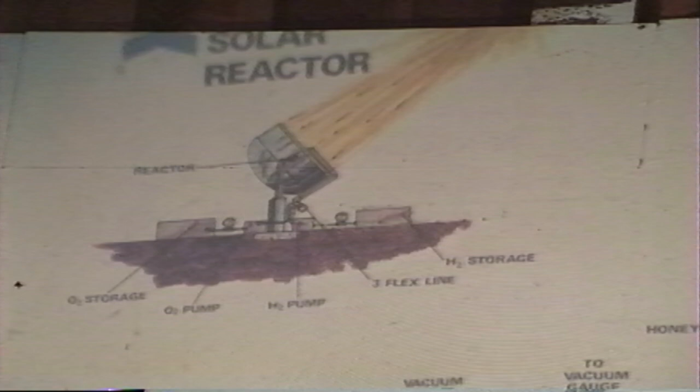So just in summary, what we've talked about here is that this is a concentrator technology that uses something relatively cheap, like a mirror, to obtain very high quality heat energy on a small area, taking energy which is low quality from a big area and concentrating it to high quality in a small area - feeding water as the feedstock, breaking the water, and then separating the products to provide hydrogen, which would be the energy vector, something you could use at night when the sun went down or during the daytime. Thank you.

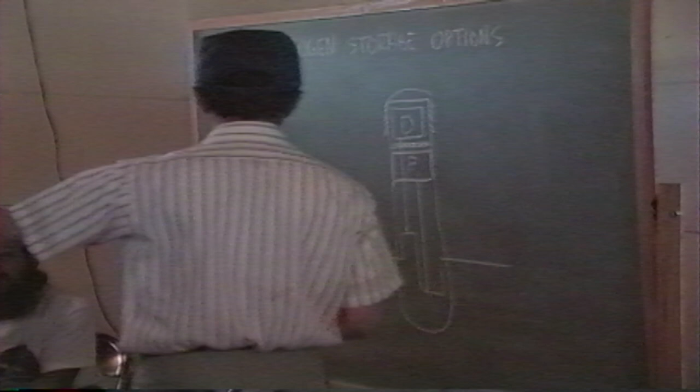If you try to move this, won't the two things go together? Try to move the axle thing. Well, what's remarkable in this regard - it looks like, boy, this is too simple to be true, it just couldn't work. That's why I brought one with me, so we'll go out and work it. I don't have one - you've had one? Yeah. Did it stop? It stopped after some time when the heat separation wasn't good enough. Ah, well, that's exactly right - if this temperature and this temperature become the same or approach each other, it won't go.

Roy, do you want to talk about the advantages of the free piston Stirling engine as opposed to this design coupled to a crankshaft? I would. Okay, where's the air come in? It's an air pump, isn't it?

Well, here's the thing. This is a leaky system. You just let it slide by things, let it be in there a while. It'll be loaded up with air, and then you rapidly heat the air up, so much more rapidly than the leaks that it works. But this is a leaky air system.

Now you can make it so that it's positively sealed by putting the bellows in. Then you'd have to do more by way of controlling the flow of the fluid. But if you did that, it's very worthwhile noting the result: you can put in working fluids that carry much more heat than air. Hydrogen carries much more heat, and it's much lower in viscosity, so you have much lower pumping losses by having hydrogen as the carrier of the energy.

My friend built one, and it had a port, and you put a little fire right next to the port, and he would stick it in, bring it up, compress it, and blow it down. It worked like a two-cycle off of that little fire. It didn't have much power, but it ran.